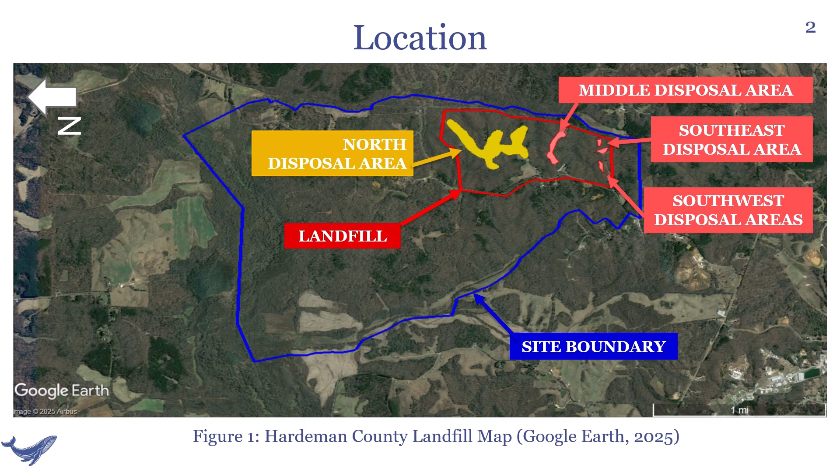Hi, we're Blue Whale Solutions, and we have designed a soil vapor extraction system for the Hardeman County landfill in western Tennessee. Our site contains 4 main disposal areas, and our project is focused on the largest, the north disposal area. The site consists of unlined trenches with 200,000 drums of pesticide manufacturing waste and is likely the largest landfill of its type. 95% of drums are estimated to have leaked.

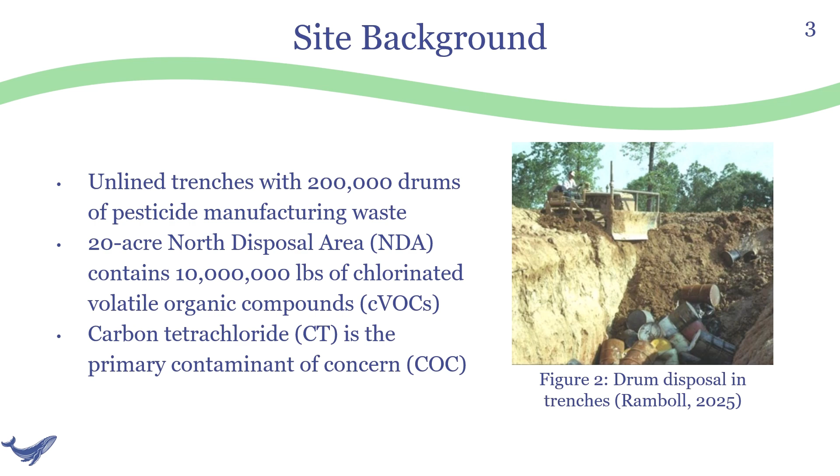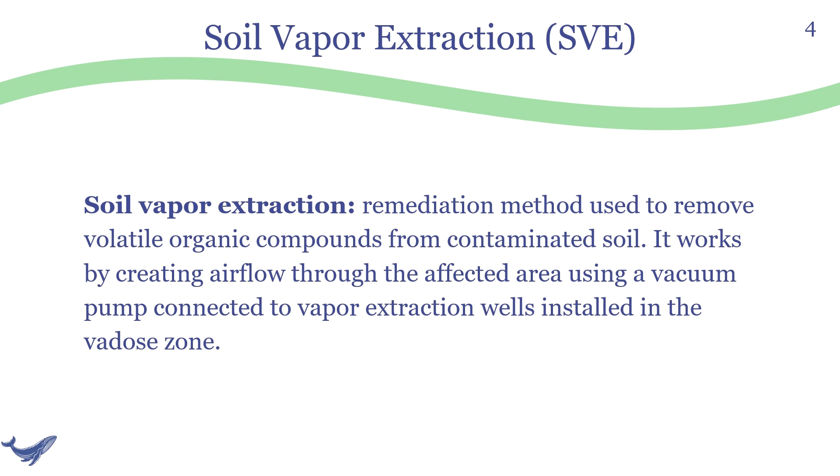The north disposal area is about 20 acres and contains an estimated 10 million pounds of chlorinated volatile organic compounds, with carbon tetrachloride as the primary contaminant of concern, as it makes up about 95% of the VOC concentrations. The project engineers decided to conduct a soil vapor extraction to remediate the vadose zone and groundwater contamination on the site. Soil vapor extraction is a remediation method used to remove volatile organic compounds from contaminated soil. It works by creating airflow through the affected area using a vacuum pump connected to vapor extraction wells installed in the vadose zone.

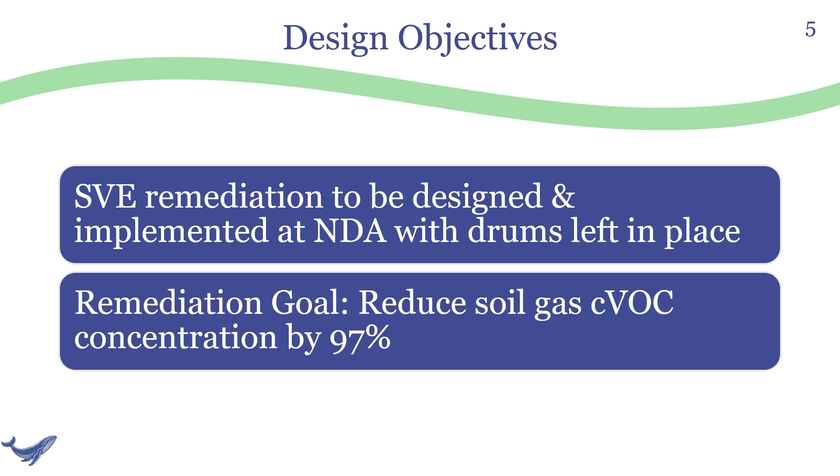Our objectives are to design an SVE remediation system for implementation in the north disposal area with the drums left in place. The remediation goal is to reduce soil gas CVOC concentration by 97%, to improve the water quality and protect human and environmental health in the area.

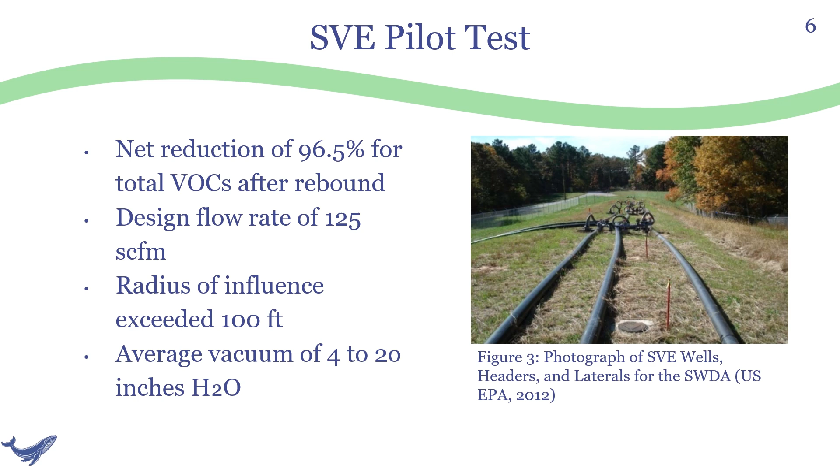A pilot test was performed in the southwest and southeast disposal areas to determine feasibility parameters for SVE on this site. From this, a net reduction of 96.5% of total VOCs was achieved after rebound, and at a design flow rate of 125 standard cubic feet per minute, the radius of influence exceeded 100 feet, with an average vacuum of 4 to 20 inches of water.

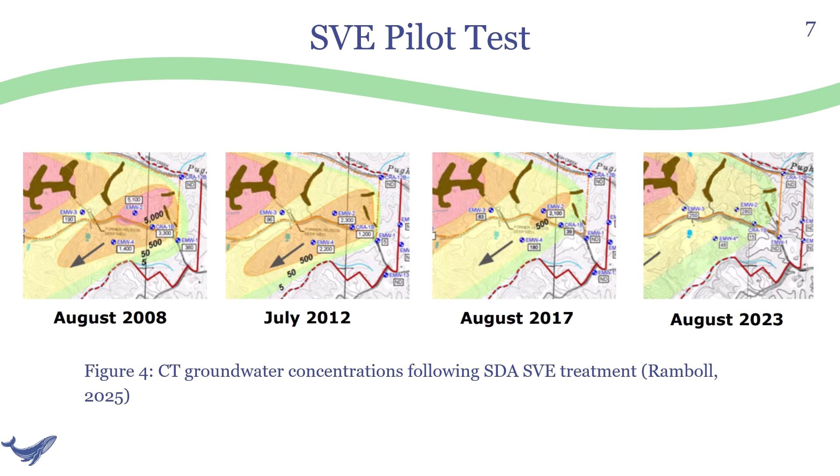After the SVE treatment of the southern disposal areas, the carbon tet concentrations observed by groundwater wells down gradient from the treatment area decreased by 1 to 2 orders of magnitude, implying that SVE in the north disposal area would largely improve groundwater quality. For our design, we had a few main assumptions. The vadose zone is 90 feet, soil is primarily sand, and the viscosity of waste air is equal to atmospheric air, due to low concentration of contaminants relative to primary air constituents.

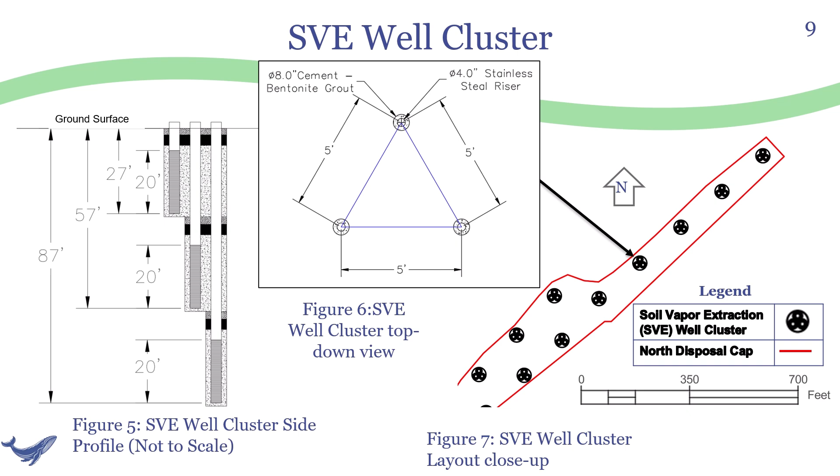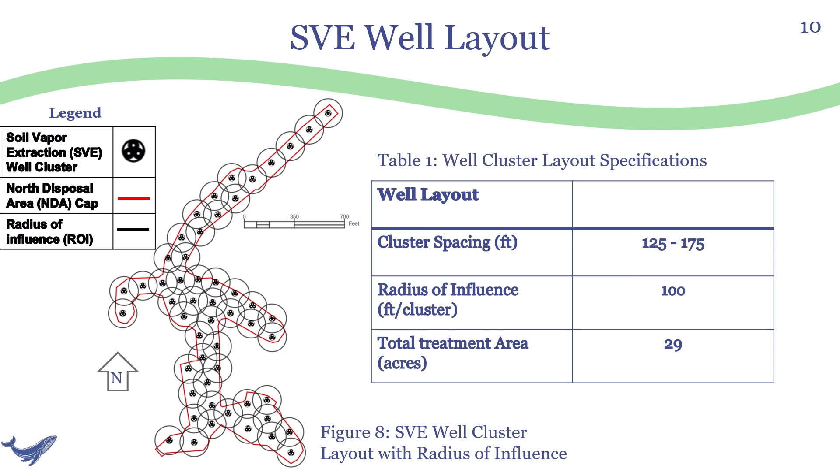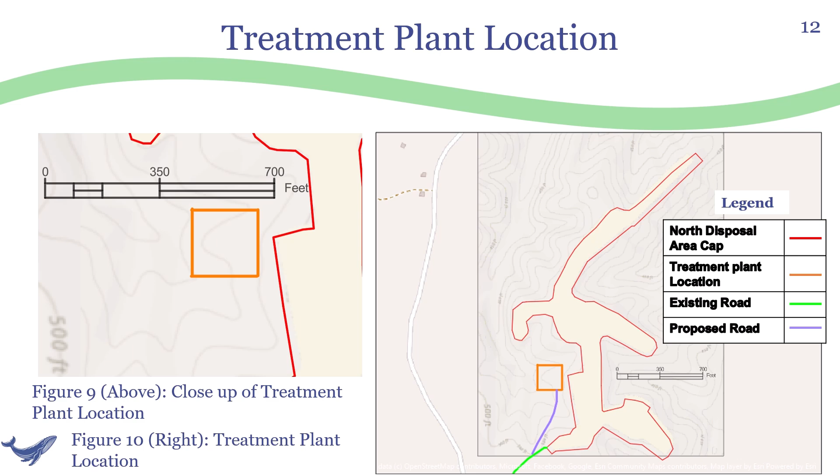Our treatment design consists of determining the treatment plant location and representing the air and condensate treatment systems in a process flow diagram. The selected treatment plant location was in the bottom left section of the area as shown. This area was selected due to its relatively flat topography and its central location relative to each third of the treatment area. This is the process flow diagram for the treatment system.

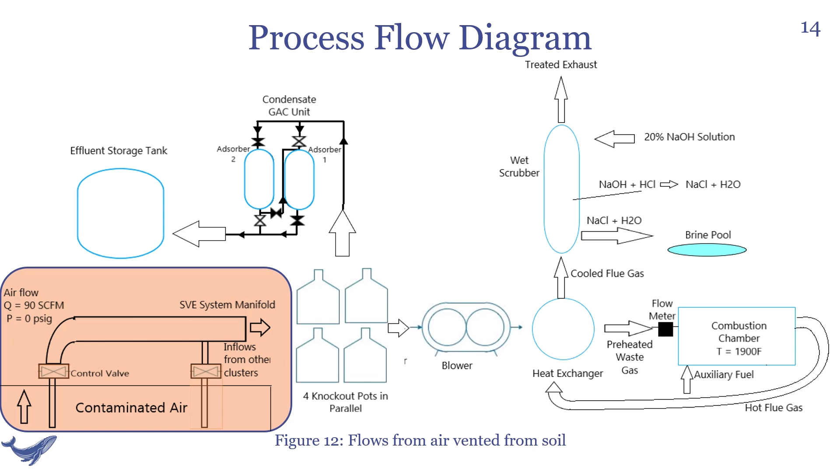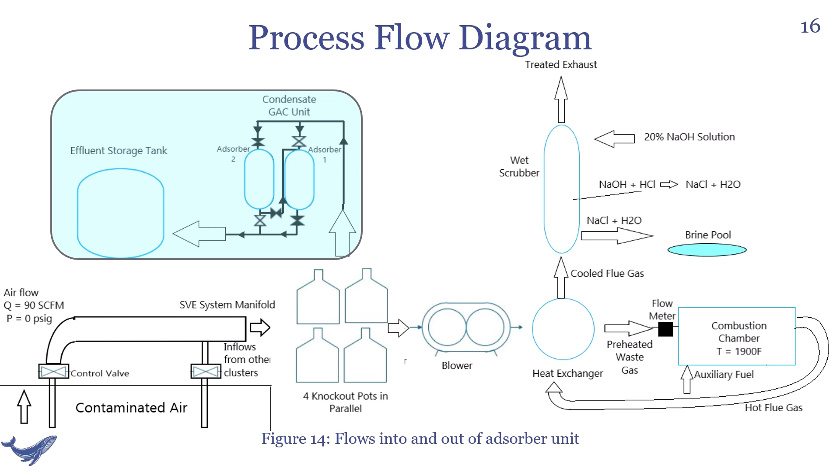First, contaminated air is drawn through the extraction wells and carried to the treatment plant through a piping manifold. Then the flow is divided into quarters to flow through 4 knockout pots in parallel, which separate the air from the condensate. The condensate is treated using a granular activated carbon adsorption system designed in a lead-lag configuration to ensure sufficient contact time. Next, on the air side of the knockout pot, a large blower generates the vacuum that extracts the vapor from the ground and moves it through the treatment system.

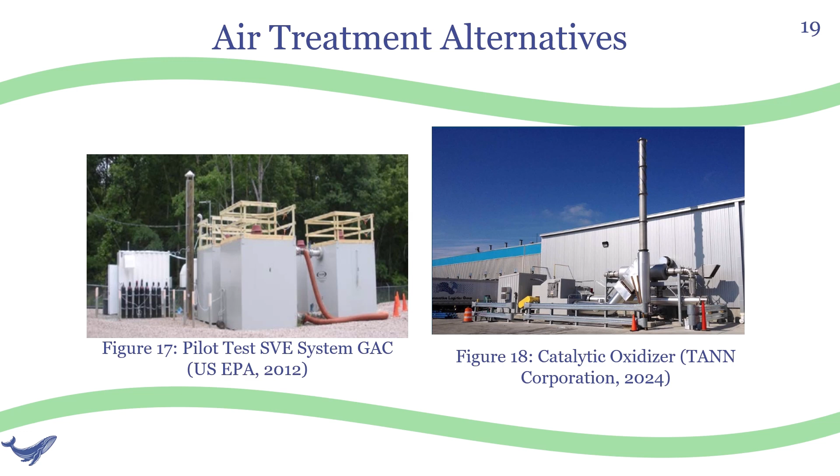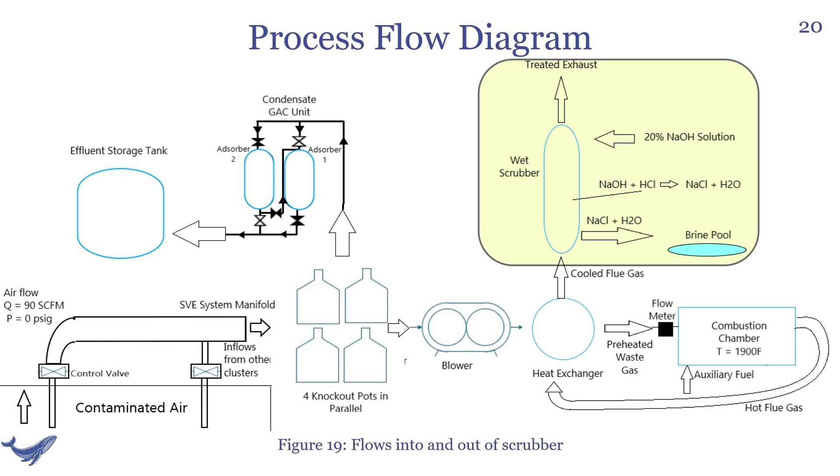In order to monitor and optimize the system, nested vapor probes were designed. These probes allow for monitoring vacuum and VOC concentrations at various depths in places other than the SVE wellheads. For these, 4 probes are screened at various depths and connected back to the surface with a 1/4-inch PTFE tubing to allow for sampling. The depths that the probes are screened at were designed to provide the most information on subsurface behavior during venting using the fewest wells. Therefore, one probe was placed at the top and one at the bottom.

The lower middle probe is placed halfway between the lower and middle screens to monitor for vertical stagnation due to competing vacuum. The upper middle probe is placed halfway along the middle screen to monitor where there should be no competing vacuum.

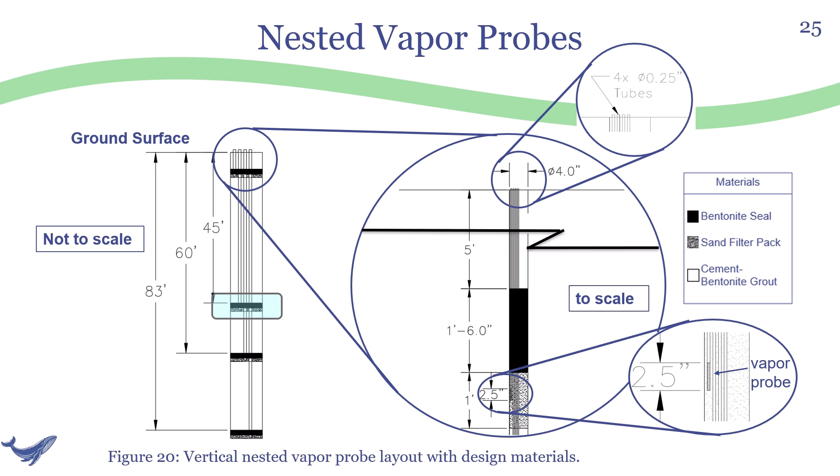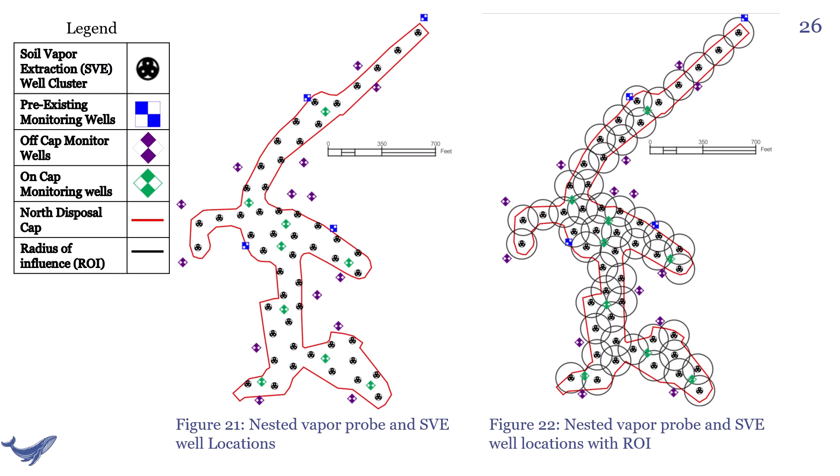The nested vapor probes are divided into two groups, on and off cap. The off cap group is relatively evenly distributed about 20 to 30 feet away from the outer radius of influence. These probes are primarily intended to ensure that the plume does not spread unexpectedly beyond expected boundaries. The on cap probes are placed in areas where the radius of influence overlaps to monitor and optimize removal.